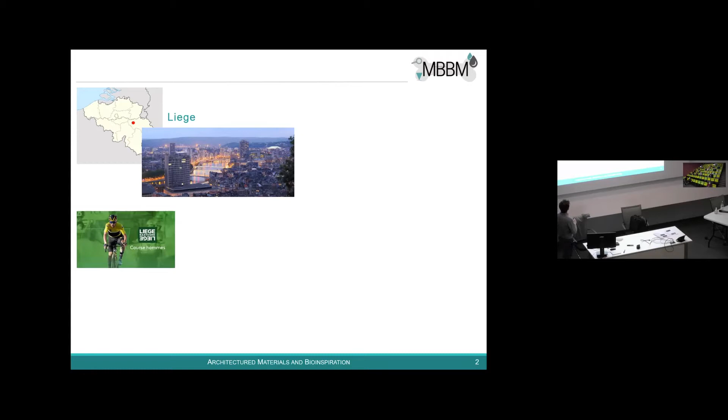Just a couple of pictures to show you where I come from, or where I'm working. I'm Italian, as Antonio, but I work in Liège, which is a city located pretty much in the middle of Belgium, in the French part of Belgium. Before moving to Liège, the only thing I knew about Liège is this famous bike race, Liège-Bastogne-Liège. But then I discovered there are other nice things in Liège: very nice, tasty beers, a bit strong, but very tasty, as chocolate also. And then there is also the university, which gives me work.

The nice thing about the University of Liège is that it's the only university in the French-speaking community of Belgium which has a university hospital. And especially if you are in my field, biomechanics, biological materials, there is a strong connection with medical doctors, so we have a strong collaboration with the doctors there.

And last but not least, in Liège there is also my group, a group of very motivated PhD students. The research that I present is mainly done by Laura Zorzetto, who is now working at the Max Planck Institute in Potsdam, where both Antonio and I did the PhD.

As Antonio said, I have two research lines, somehow complementary. I'm interested in biological materials, and especially in the interfaces between different types of biological materials. The main focus is on materials of the musculoskeletal system, and those interfaces which connect different materials of the musculoskeletal system are very interesting because they have to solve a very challenging task: connecting two tissues, like tendon and bone, which have very dissimilar mechanical behavior.

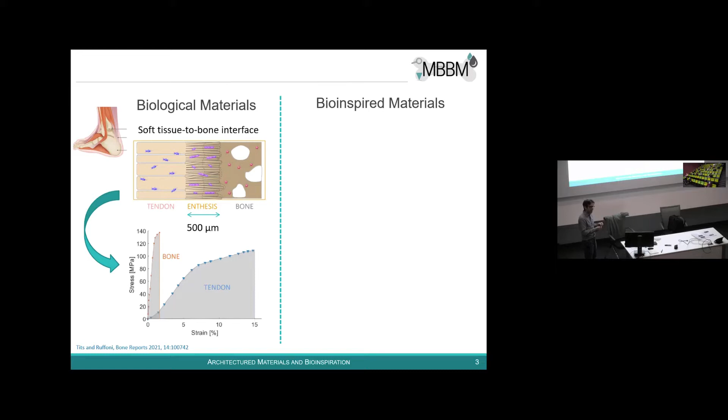So we are trying to learn what is happening here and how to translate this into synthetic materials, to facilitate the attachment of very dissimilar man-made materials.

In parallel, what we are looking at is bioinspired materials. What I mean is that we investigate biological materials, and we focus on selected construction principles at different length scales, and then we try to reproduce these and translate them into synthetic materials. This will be the main topic of my presentation today, which I will now enter into in more detail.

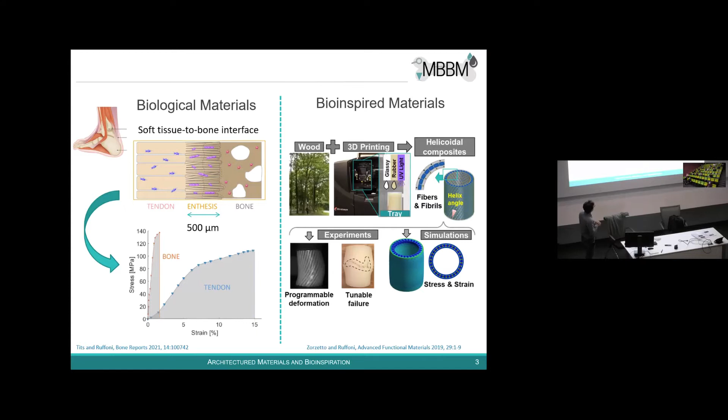Why do we plot these two properties together? Because normally they are in contrast. A material which is very stiff is normally very brittle, and a material which is very tough is normally more compliant.

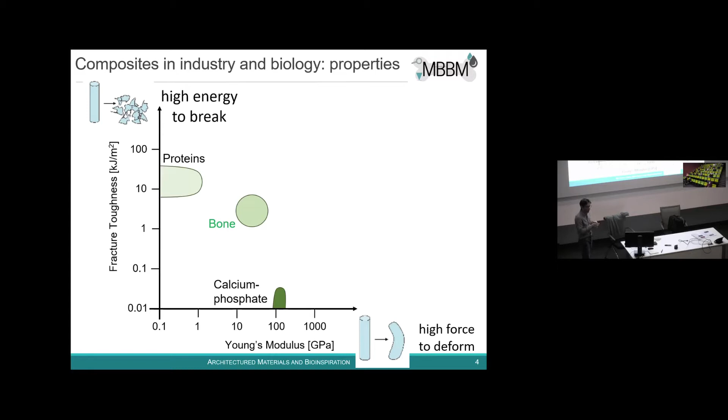In nature, if we take the example of bone, bone is composed of a mineral, calcium phosphate, which is a ceramic-like material. It's very stiff, but also very brittle. It's also composed of proteins, collagen, which are polymeric materials, biopolymers, which are soft but also very tough.

Bone has the ability to combine these two and make the best of the two properties. So when we combine the two, we have a tissue, a biological material, which is both stiff and tough. In classical engineering materials, although they have higher properties than biological materials, the relative combination of those properties is not as efficient as what nature is doing. When we combine those properties, we always have a compromise which is not there in biological material.

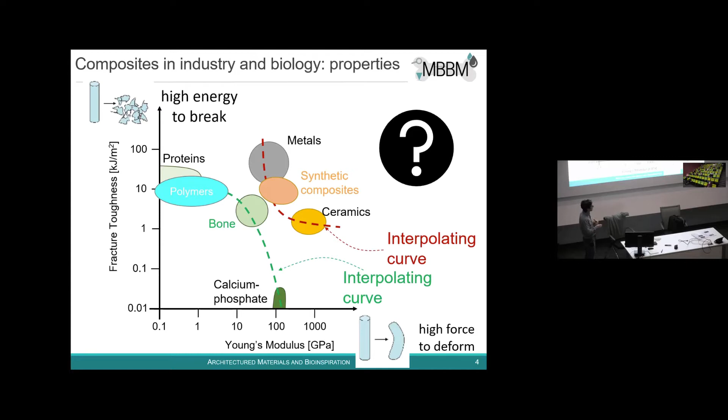This is a little bit why we consider this a nice source of inspiration, and we try to replicate those features in engineering materials by trying to see which tricks nature is using in those biological materials, such that they can combine these conflicting properties.

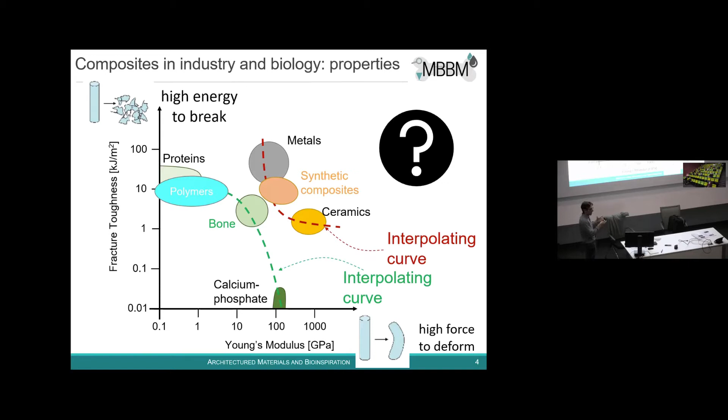By architectured materials, we mean those materials where we can define well-defined structural arrangements or structural motifs which are intermediate between the elementary building blocks, typically at the nanoscale, and the component size at the centimeter or meter level.

So we are interested in developing bioinspired materials where we can control architecture at multiple length scales between our elementary building blocks, which I will show you in case of our bioinspired materials, and the overall object size. One advantage of introducing architecture inside the material, with respect to a monolithic homogeneous material, is once again represented here in terms of mechanical properties.

I will focus mainly on mechanical properties, but there are other aspects which are also interesting in architectured materials, for example the ability to introduce multifunctionalities. But in this talk, I will consider mechanical properties.

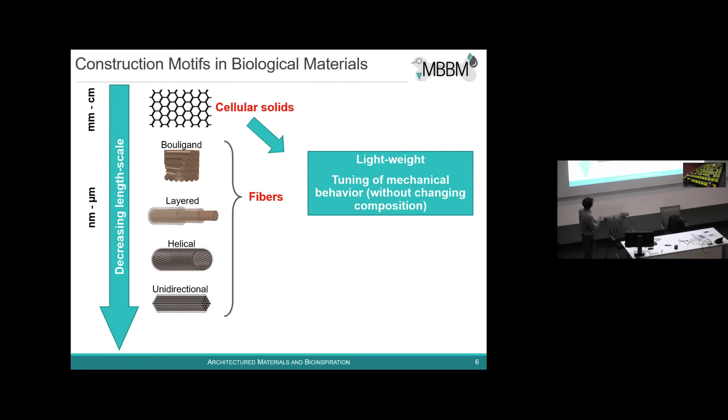Another construction principle that we see very often in biological material is that they are composed of fibers over many length scales. I'll come back to this in a second. Fibers are typically biopolymers, which are reinforced by different strategies with mineral crystals, for example, or with covalent crosslinks.

Fibers in biological materials show a very rich book of different structural motifs, ranging from unidirectional fibers, helical fibers, combination of multi-layers with fibers oriented in different directions, or also the so-called Bouligand architecture, where planes of fibers are stacked on top of each other with different angles, providing extremely high fracture resistance properties. These construction principles are very often seen in biological materials.

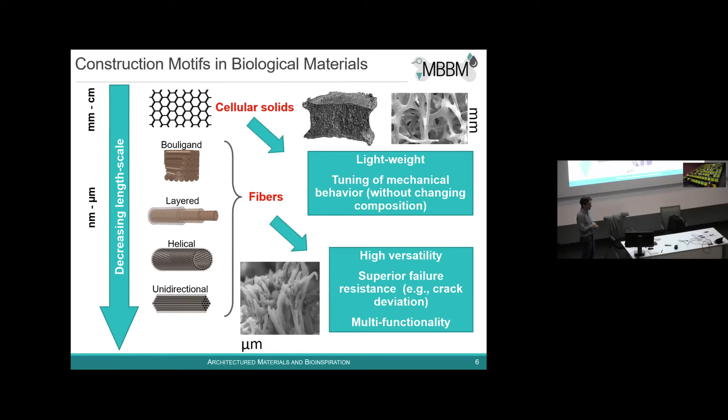These are now the construction principles that we try to replicate a little in synthetic materials using 3D printing. The aim of the research I'm presenting is really to prototype architectured materials inspired by biological composites, using three-dimensional multimaterial printing.

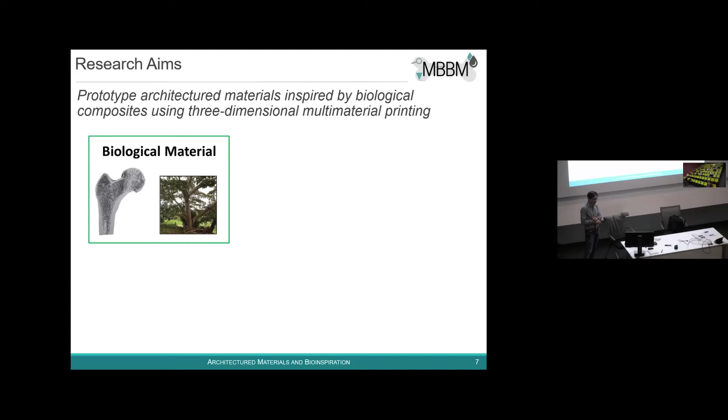The idea is that we start from an observation of a construction principle of a biological material. We focused a lot on bone and on wood. Then we isolate the construction principle, which is typically at a small length scale, intermediate between nanometer and millimeters.

Then we scale this up, simplify it, and decide which features we want to replicate. We use three-dimensional printing, and at the end we use experiments and computer simulation to understand if these construction principles also work in artificial materials, and to see the constraints and advantages that this brings to the bioinspired structure. So that's a little bit the research strategy that we are following.

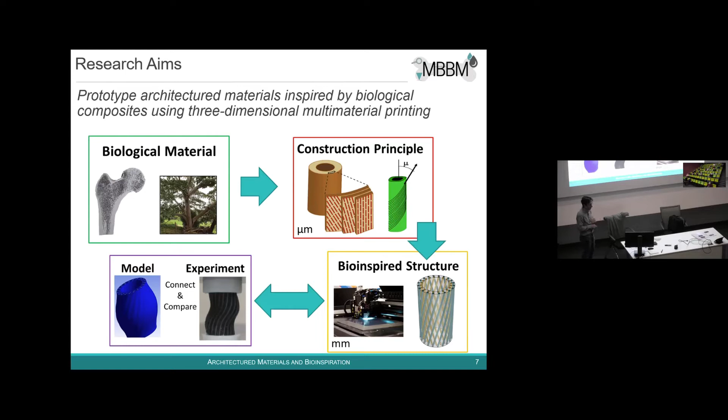What I will present today is a very short introduction to this type of multimaterial printing that we're using. Then I focus a little on the interfaces between the different materials. Since this is a multimaterial approach, one issue is that there are interfaces between the different materials, which have not been much investigated. Then I'll show you one example of a bioinspired helicoidal composite material, and then of a cellular solid material that we have been developing.

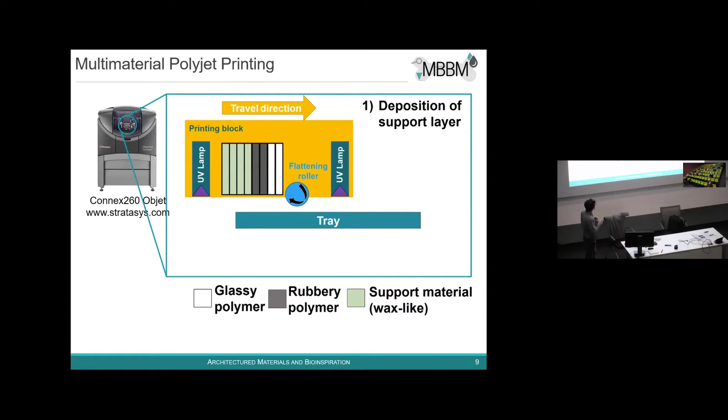The first thing I want to speak about is this three-dimensional printing. We are using a commercial printer, and I will tell you a little later why we chose to go in this direction. The printer is a polymer printer, based on the deposition of monomers, liquid monomers, droplets of liquid monomers, which are then flattened by a roller and cured by UV light.

There's even a small animation. The printer head is moving from left to right, depositing different droplets of different polymers. They are deposited on the build tray, flattened down by a roller, and then cured by UV light. Typical droplet dimensions are about 20 micrometers, and layer thickness, since this is a layer-by-layer technique, is about 20 micrometers as well. That's the resolution, the theoretical resolution of the printer.

What's nice is that with this printer you can combine different basic polymers, liquid inks, which in this animation are only 2, but now the new printers are able to work with up to 5 different inks. Different inks then result in cured polymers with very different mechanical properties. This technology is called polyjet printing, based on photocurable monomers.

Since it's commercially a commercial printer, it's stable, it's reliable, but of course it's a proprietary technology, so there is no possibility yet to customize the inks, for example inserting nanoparticles and so on. This is something which is not really easy to do.

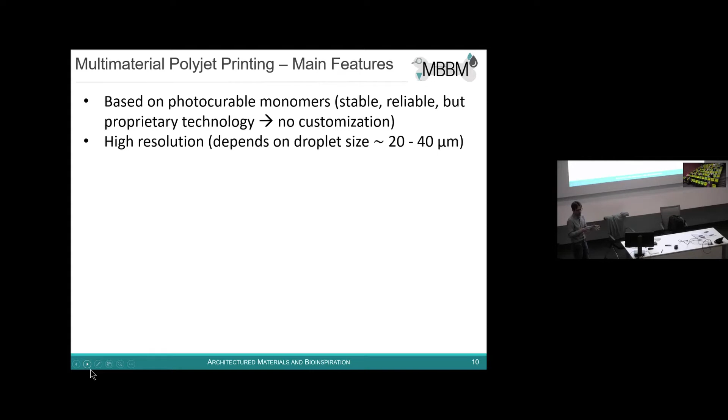That's probably the multimaterial technique commercially available which has the highest resolution, because we have droplets of about 20 to 40 micrometers in diameter, depending on the layer. And this allows them to build objects which are about 25 centimeters in size. So we have this control over multiple length scales.

And then, as I said, it's multimaterial. The two basic materials, the two most extreme materials that we can use, are the stiffest material, which has a Young's modulus of about 2.5 gigapascals, so it's a hard plastic with an elongation at break of 15%. And the softest material has a Young's modulus of about 1 megapascal with an elongation at break of 220%, so it's an elastomer. So we have 3 orders of magnitude variation in mechanical behavior that we can combine.

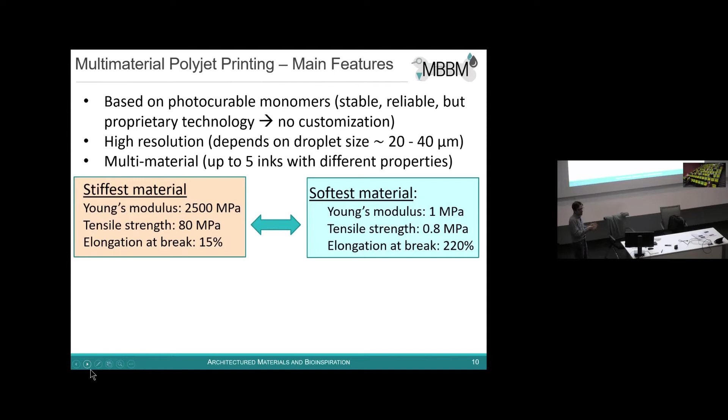So in that sense, it's multi-material, although it's still based on polymers, but we can cover a spectrum of 3 orders of magnitude. And what I find very interesting is that we can fabricate so-called voxelated soft-hard matter. So, repeating myself a bit, we can build centimeter-sized objects which have a programmable composition and structure at the micrometer level. There's a nice Nature paper from the group of Jennifer Lewis at this institute describing the new avenues which are opening up for this type of voxelated materials.

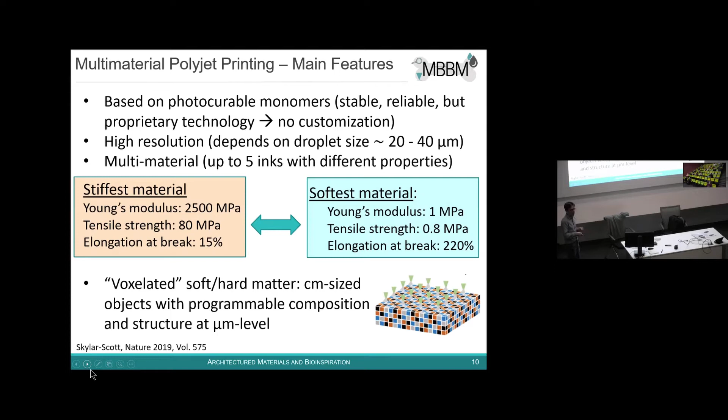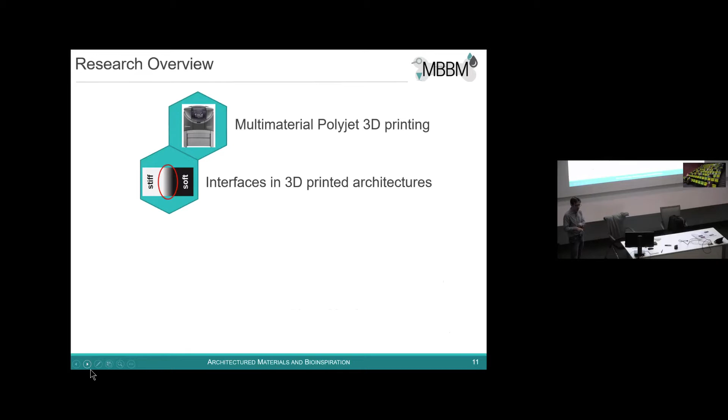Now, okay, this was the short introduction. Now I'll focus a little bit on the interfaces between different voxels and different materials in this technique. So, yes, let me just repeat what I just said: we can tune with this approach local microstructure, chemical composition, and mechanical properties.

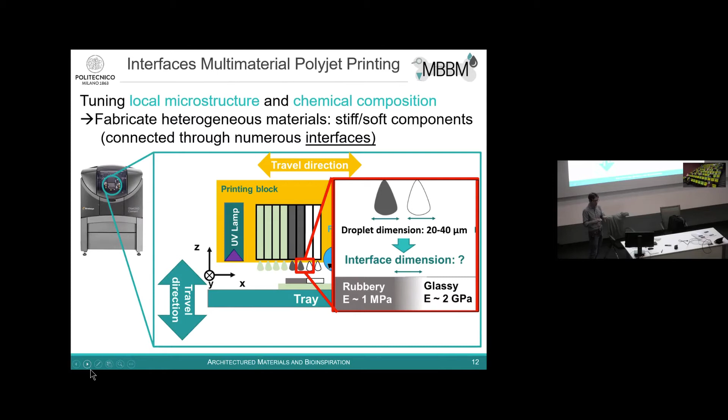We have 2 different droplets which are deposited and which are then cured on this layer. And the question is, what is happening at the interface between these 2 different droplets, or these 2 different polymers, depending a little bit on the printing modality.

And if you enter into the details of the printing process, there are 2 different ways that 2 polymers can get in contact. You can have a simultaneous deposition of the two polymers, which are represented here with the 2 colors, so they are deposited simultaneously and get in contact on the build tray before being cured by UV light. Or they can be deposited consecutively, so you first deposit one polymer and then cure it.

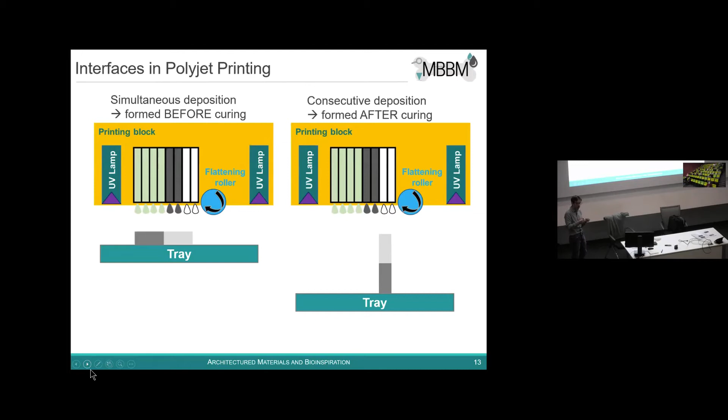And then on top of an almost fully cured polymer, you deposit the second droplet, and then you cure this. So this is what we call the interface formed after curing, versus here the interface is formed before curing of the 2 polymers. And we are asking, what are the properties of the interfaces in these 2 different scenarios?

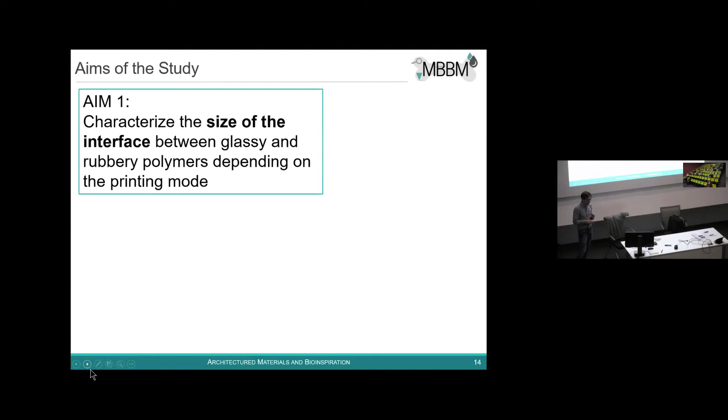So, yes, the two aims of this research are to characterize the size of the interface between these glassy and rubbery polymers. For that, since we have micrometer length scale droplets, we have to use a technique which allows this resolution.

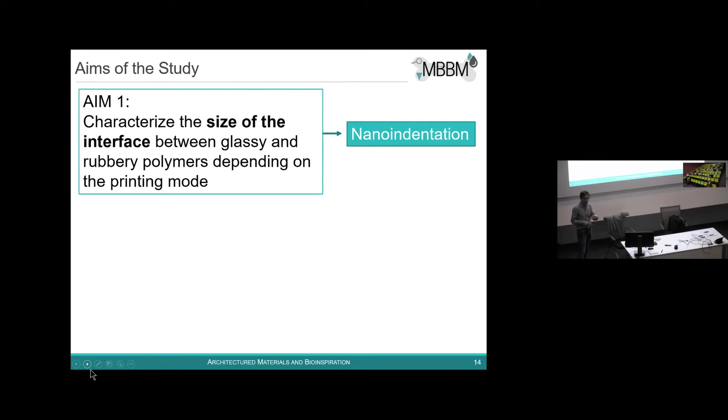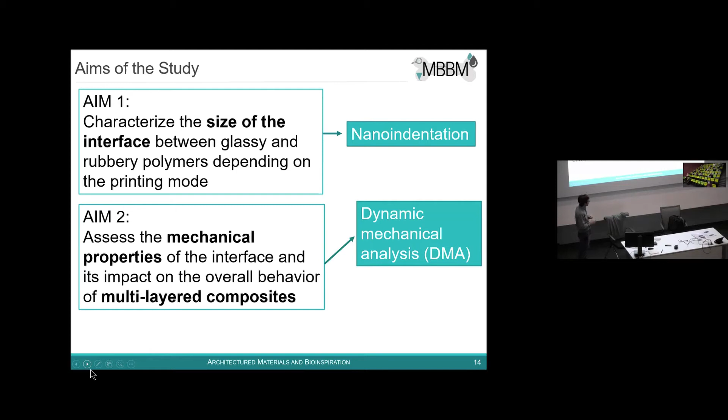And so we chose to use nano-indentation. And then we want to assess the mechanical behavior of the interface and the impact of having an interface which is not ideal, so it's not a zero-thickness interface — the impact of this interface on the behavior of multi-layer composites, simple multi-layer composites. For that, we use dynamic mechanical analysis and some numerical modeling.

Yes, so I think here I can go a little bit quicker. We prepare the samples first for nano-indentation. We printed small samples where the interface was formed before UV curing. And by changing the orientation of the samples, we obtain samples with the interface formed after UV curing.

And then the problem with nano-indentation is that we need a very smooth surface, which is also a bit tricky when you have polymers with such big differences in mechanical behavior, because you cannot do standard polishing like in metallurgy. So what we did here was cryomicrotome cutting, and so we had a very smooth surface, nanometer-scale roughness, and then we could nano-indent.

So we pressed a diamond tip on the samples and measured the force and displacement of this tip. Then we used models, based on the force-displacement curve, to get the local Young's modulus. This is also a bit tricky, not straightforward, because we have to indent stiff polymers and soft polymers, and in soft polymers you have adhesion effects, which is something you have to take into account when you indent.

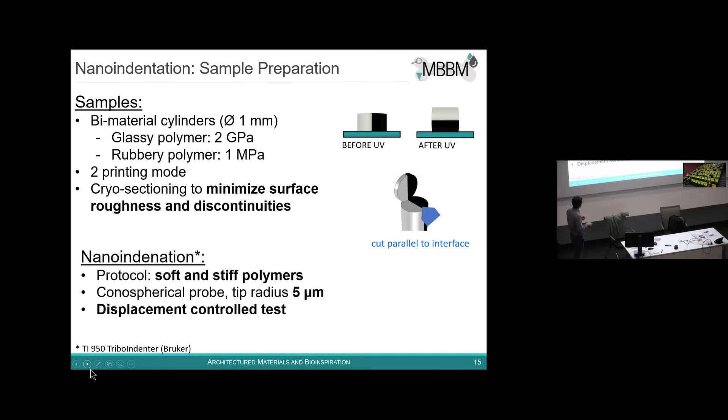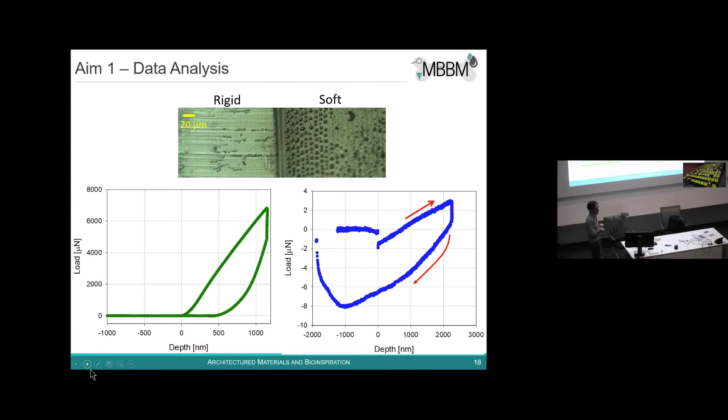So yes, we needed to develop the indentation approach a little bit. Fortunately, there is already quite some literature on indentation of very soft materials, so we could exploit this, and basically from our measurement we could estimate the contact radius between the probe and the sample and use this to derive the so-called reduced modulus of the indentation.

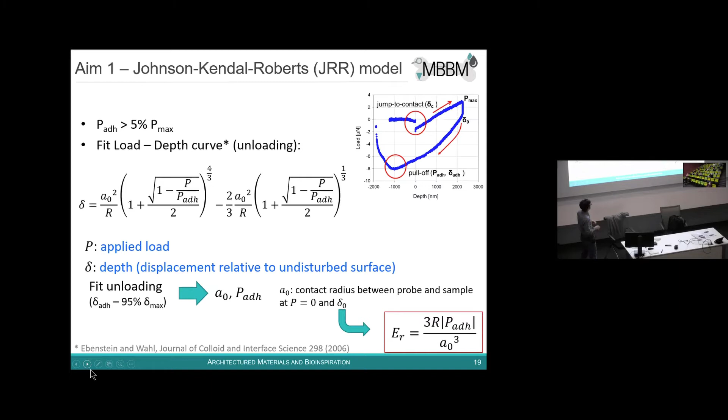Now I jump to the result. These are the properties of the interface formed after UV curing, where one polymer is deposited on top of an already partially cured polymer. Going from the stiff to the soft polymer, plotting relative position in spatial coordinates, you see a very sharp transition of about less than 20 micrometers, a transition between 2 gigapascal and less than 1 megapascal in properties.

Here we don't see those regular blisters anymore. This time we indented between stiff, soft, stiff, to acquire more points and see the trend of the interface. You see that the interface is much broader, and we measure an interface thickness of about 150 micrometers, which is several times the dimension of the droplets being deposited.

So there is some diffusion, and also some mechanical diffusion if you want, because of the roller which levels the layers, plus some probably chemical diffusion, mechanical and chemical diffusion. In any case, there is some chemical diffusion where the droplets, the monomers, the oligomers, interdiffuse and broaden the interface.

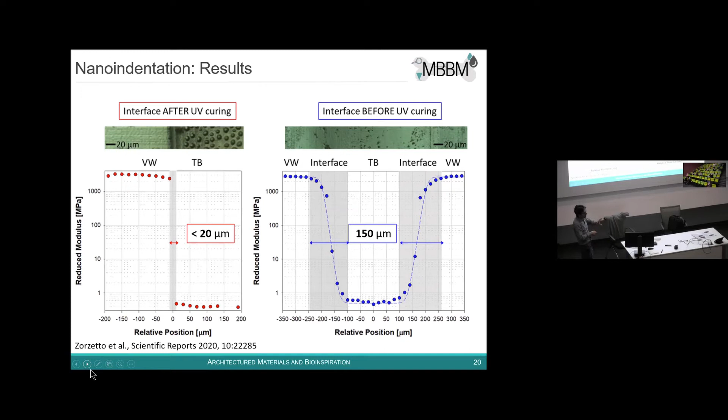These are first results showing how critically the thickness of the interface depends on the printing modality. We then wanted to assess the impact of the interface on the behavior of very simple multi-layer composite materials, so we printed composite materials at the millimeter length scale with alternating layers of soft and hard polymers, printed such that the interface between layers was either sharp or very broad.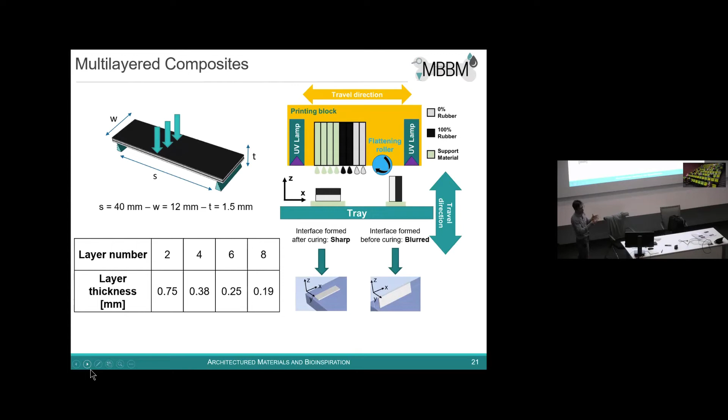We printed these and then performed dynamic mechanical analysis to measure the dynamic properties, using a 3-point bending configuration, scanning the behavior across different temperature ranges to see what happens across the phase transitions. The main outputs we consider are the so-called storage modulus and the tangent delta, typical parameters describing the dynamic behavior of these polymeric systems.

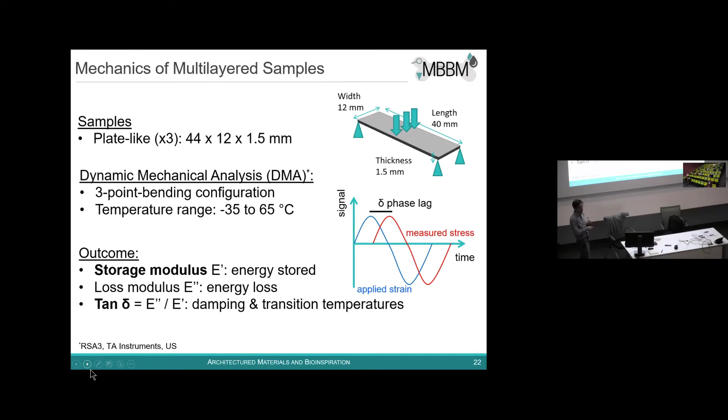Now I will just show you this, a plot of the storage modulus.

Let's concentrate on this region around room temperature, a little away from glass transitions, and look at what happens when we increase the number of layers. This is a system with only 2 layers, stiff and soft; this has 4, 6, and 8 layers. The volume fraction of stiff and soft phase is always the same—we're simply redistributing it across the cross section, which changes the area moment and the bending behavior.

With a blurred interface, about 150 micrometers, when we increase the layers from 2 to 8, the storage modulus increases. This isn't surprising—it's in agreement with composite beam theory. By redistributing the stiff material across the interface, you get more rigid behavior. This is predictable, understandable, and we were happy.

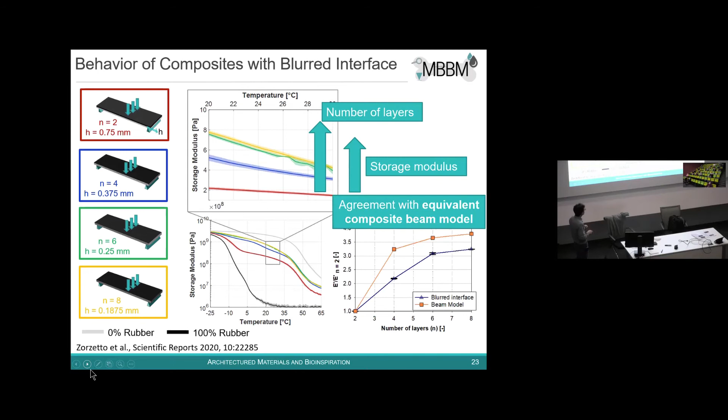The problem is if you do this with a sharp interface instead, with exactly the same configuration—layers from 2 to 4 to 6 to 8—but now the interface is very sharp, less than 20 micrometers compared to at least 150 before, we see no changes in mechanical properties as we increase the number of layers. Everything stays flat from 2 to 8.

We see this also in the full storage modulus versus temperature curves. In gray is the storage modulus of the stiff phase, in black of the soft phase, and these are the storage moduli of the different layers. Here I zoom into a temperature range a little away from the transitions.

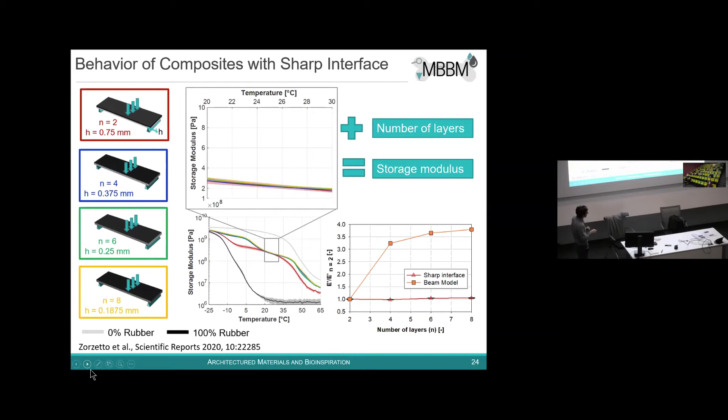This is something we didn't understand at first, and it's also in contrast with the beam model. A simple beam model would predict an increase in bending rigidity because we're redistributing the material, but what we see is that bending rigidity does not depend on the number of layers. So we asked, what is going on?

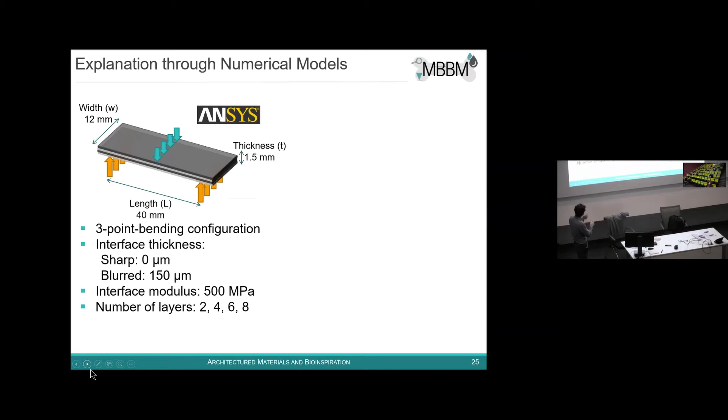To understand this, we did finite element simulations, translating our system into a virtual material, replicating the experimental conditions, considering both sharp and blurred interfaces. In the sharp interface case, our simulations also show no increase in bending rigidity with more layers. The blurred interface simulations were qualitatively similar to experiments, as were the sharp interface simulations.

What's happening in the simulations is that we accounted for shear behavior. With a very sharp interface, there's transmission of stresses that induce a lot of shear in the soft layer. The stiff layers deform with a lot of shear deformation between them induced by the soft layer, which is not present with a blurred interface. This is a didactic example showing the impact of such interfaces, even in a simple geometrical arrangement like this multi-layer composite.

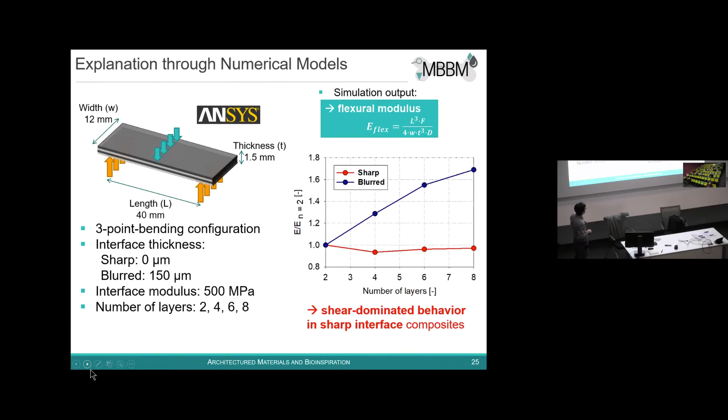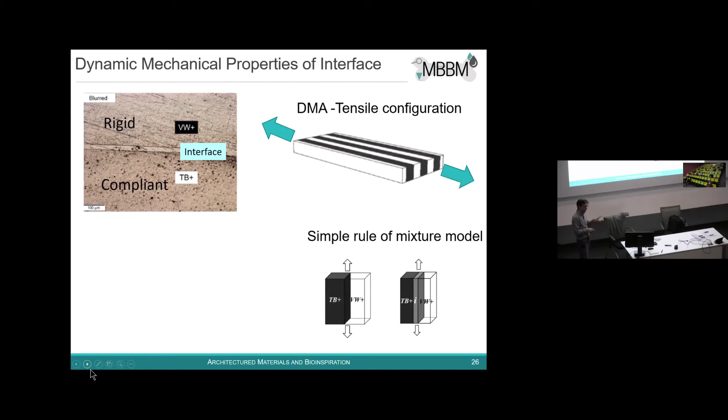We then went further and designed other samples. This is an optical picture of the interface between the rigid and compliant polymers. We tested these samples in tension rather than 3-point bending, still using dynamic mechanical analysis but in a tensile configuration, because that let us use a simple rule of mixture model to extract the dynamic properties of the interface itself—something not possible in 3-point bending since it gets too complicated, especially for the loss properties. So we used a simple rule of mixture to build a model predicting the storage modulus, loss modulus, and tan delta.

We then compared what happens in these plate-like multi-layer samples with different amounts of interface due to different numbers of layers. To cut the story short, what we see is that the interfaces, although mixing equal amounts of soft and hard polymer, are strongly dominated by the rigid component.

So the interface has properties which are strongly dominated by the rigid polymers, and also in the interface itself, the viscoelastic dissipation typical of the soft polymer is totally suppressed. So that was a little bit surprising.

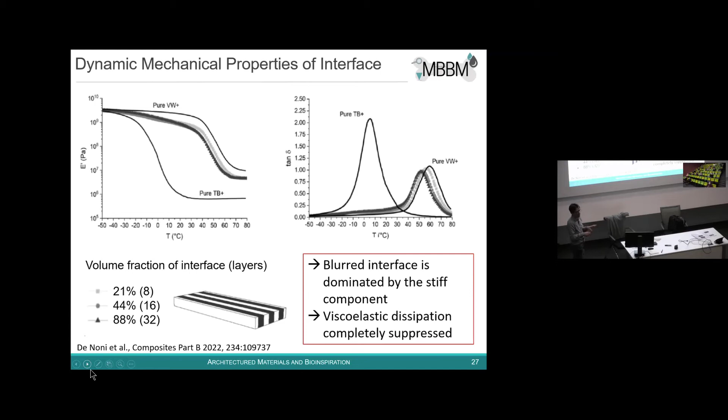So in conclusion, here we have proof that there is formation of an interface in this 3D printing multimaterial approach, which can be several times bigger than droplet size. This blurred interface is actually an interface, a third material which has properties more similar to the glassy polymer, both in storage properties and dissipation properties.

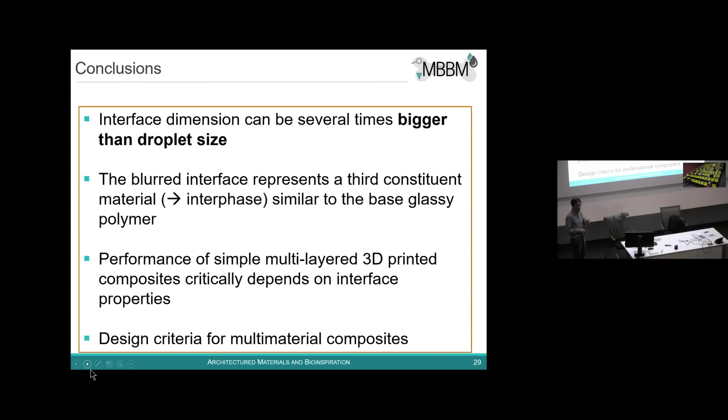We have shown that the performance of these simple multi-layer 3D printed composites is critically dependent on the interface. This can provide new design criteria for multi-layer materials where we have to account for the presence of the interface. So I'll go maybe to the second study, and then take questions at the end, if it's okay.

Now I'll show you a study we did on helicoidal composites, now that we know a little bit what is happening with the interface and what dimension we expect for it. I want to show a different study where we introduce fibers. The motivation is that many biological materials, as I said, are constructed with fibers, and fibers also have some typical helicoidal arrangement.

Two examples are bone and wood. Bone is composed of two types: cortical bone, which is very compact, and trabecular bone, which I quickly presented before as the highly porous type found in the vertebral body. Cortical bone has very small porosity, but there is some porosity because of blood vessels, which bring nutrients to cells, protected by features called osteons.

Osteons are cylindrical features where fibers of collagen are arranged in a helicoidal fashion. This is something at the micrometer length scale that we see in bone. And in wood, similarly, we also have helicoidal arrangement.

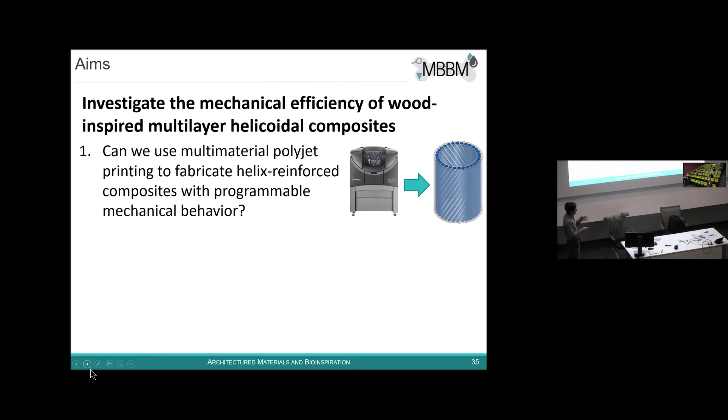Our idea is somehow to translate this, which is quite straightforward, into artificial materials with 3D printing. And then we want to exploit it further, which is a little bit less straightforward.

We want to understand the interplay between a central layer with thick fiber and inner and outer reinforcing layers with much smaller fibrils, and to see the mechanical interplay when I try to reinforce a central layer where fibers have some angle, with smaller fibers arranged either internally or externally.

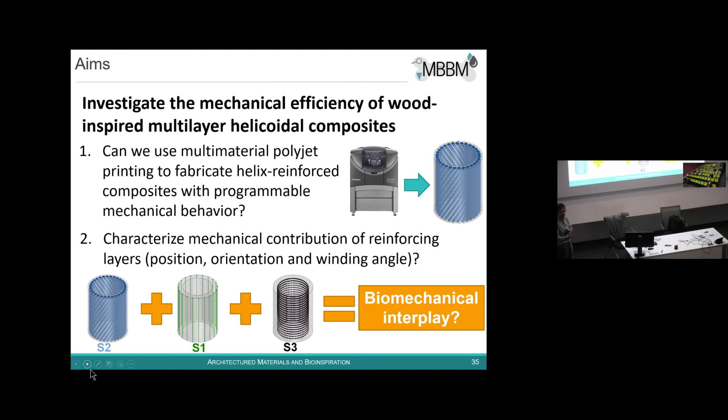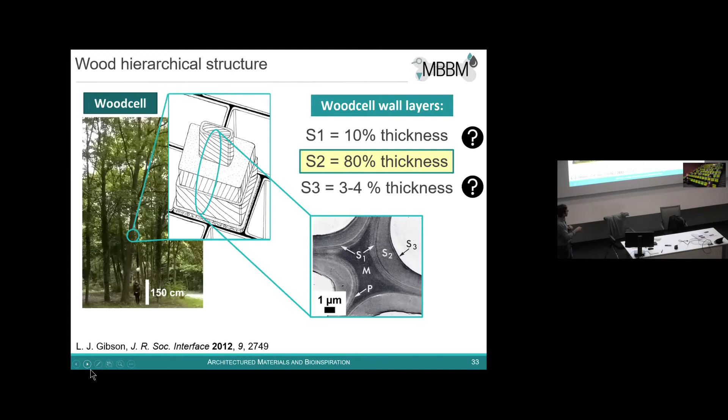This is something that is not so clear, and also in wood it's not so clear what the role of the S1 and S3 layers is. That's why we thought if we do this, we could maybe learn a little bit why in wood we have these much thinner layers where fibers have typically horizontal orientation, rather than a well-defined orientation as in the central layer.

So we designed and had to scale this up because of printer resolution, since we cannot print at the nanometer length scale of cellulose. We scaled up to the millimeter length scale and printed a system with a central layer representing 60% of the thickness of these cylinders, reinforced by smaller S1 and S3 layers making up about 20% of the total thickness. In terms of fiber volume fraction, the central layer has 30% fibers with the rest a soft matrix, and we have 3 to 6% volume fraction of reinforcing fibers in the inner and outer layers. We combined different configurations.

We had the main layer with fibers from 0 degrees vertical up to 45 degrees, and as reinforcing layer we considered both only horizontal and only vertical fibers, to reduce the parameter space and see the interplay in terms of mechanical properties when we vary these structures.

How much time do I have? Still 5 minutes approximately, right? 15 in total? Okay, thanks.

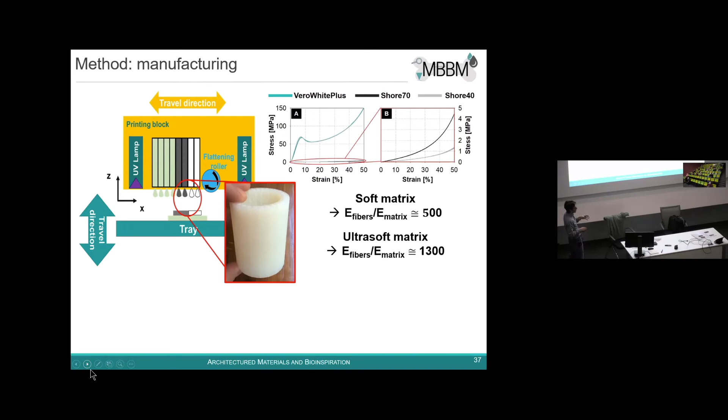We 3D printed this using stiff fibers, about 2.5 gigapascals, and considered two types of matrix such that the elastic contrast between fibers and matrix is a factor of 500 or more than a factor of 1000, what we call soft matrix or ultra-soft matrix. The matrix is an elastomeric material, and the fibers are glassy rigid polymers.

We then performed mechanical tests to failure and explored the behavior of the system.

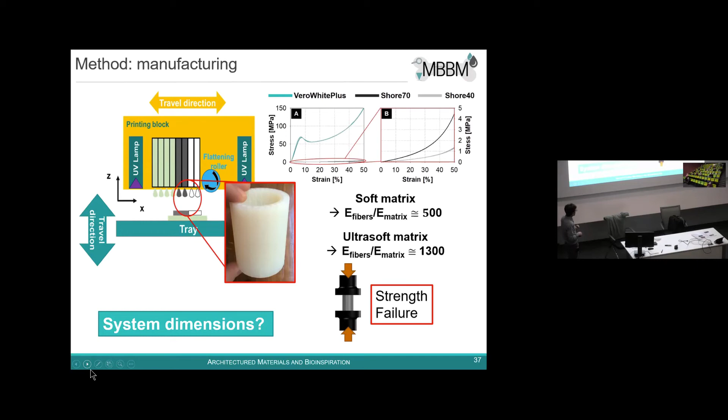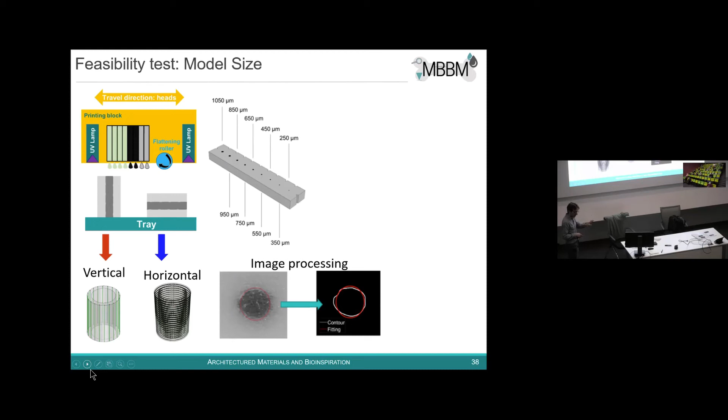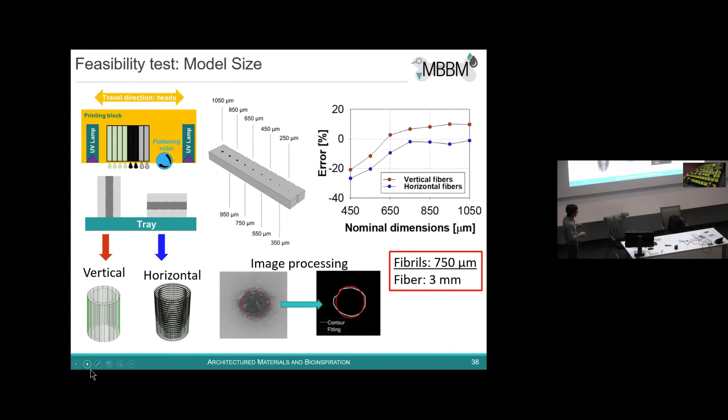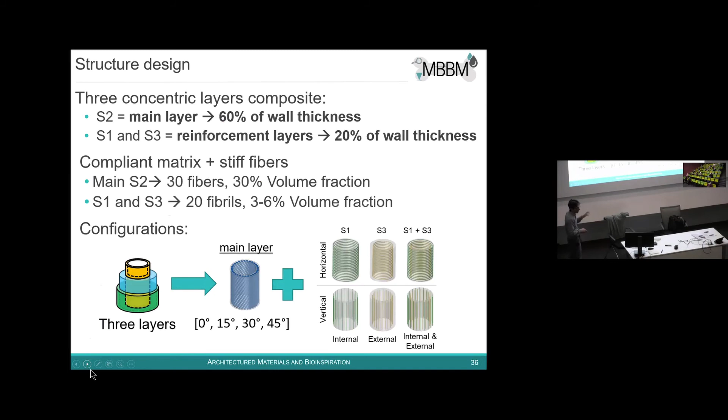One first question was: what is the minimal dimension of the fibers we can print? We did a preliminary study based on printer resolution and interface dimension, and found the minimal diameter for fibrils that are still representative in terms of mechanical behavior is about 750 micrometers. We scaled fibers up to 3 millimeters in diameter, reinforced with smaller fibrils of 750 micrometers diameter, so a factor of up to 4 less.

We first did an analysis of the apparent stiffness of the system by changing the fiber winding angle, and also the maximum compressive strength. We see that this technique allows us to tune or program the stiffness of the system, with similar qualitative trends for both soft and ultra-soft matrix.

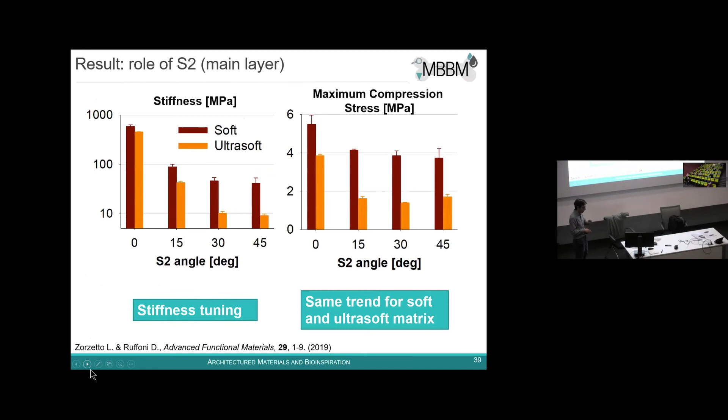I'll quickly skip this because I want to show you something more interesting, then come back to it. We performed experimental tests to failure, and here is what we see.

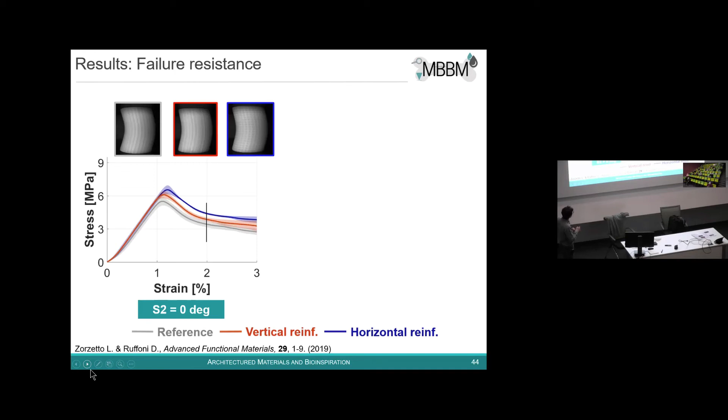This is the behavior for straight fibers: a cylinder with straight vertical fibers. Not a big surprise—when we compress this system it buckles, going into buckling failure. If we add either vertical or horizontal reinforcement, we don't change the behavior much. There's a small increase in buckling strength, but the behavior is substantially the same. We're not tuning or influencing the structure much this way.

What's interesting is what happens when we do the same exercise but the main fibers have some angle. Here I present results at 15 degrees, for example. At this angle, the system does not show the big, catastrophic failure seen with straight fibers.

What is interesting is what happens when we add vertical reinforcement, reinforcing the tilted fibers with vertical fibrils. They provide a slight increase in stiffness, but essentially the behavior does not change a lot. You see this collective buckling or kinking of these vertical fibers, a collective buckling because they somehow feel each other through the matrix. So as soon as one fiber buckles, the whole structure buckles.

But what is interesting is when we introduce the horizontal reinforcement. This reinforcement is able to delay the failure and dramatically increase the strength of the system.

We also see this if we examine the post-failure structures. In the case of vertical reinforcement, we see a long crack running through the system. In the case of horizontal reinforcement, the crack at some point also runs horizontally. So we are also tuning the way it breaks.

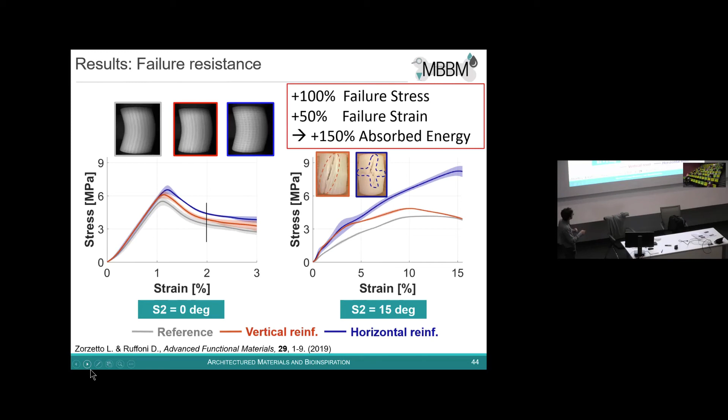Because of this, we have a 100% increase in failure stress, a 50% increase in failure strain, and a structure which absorbs 150% more energy.

I also want to show this plot. We ran finite element simulations of the same structure to understand how it deforms, and we saw that introducing horizontal fibers blocks the expansion of those cylinders.

When we compress and measure the Poisson ratio, the expansion perpendicular to the direction of compression, we saw that with vertical fibers the behavior is pretty similar to having no fibers, while with horizontal fibers we block the expansion, giving a much smaller Poisson ratio.

On the other side, what increases is the rotation of the cylinder. The rotation along the vertical axis increases where we add horizontal reinforcement. So the horizontal reinforcement triggers more rotation of the system, and this delays the failure and also deviates the crack from vertical to horizontal direction.

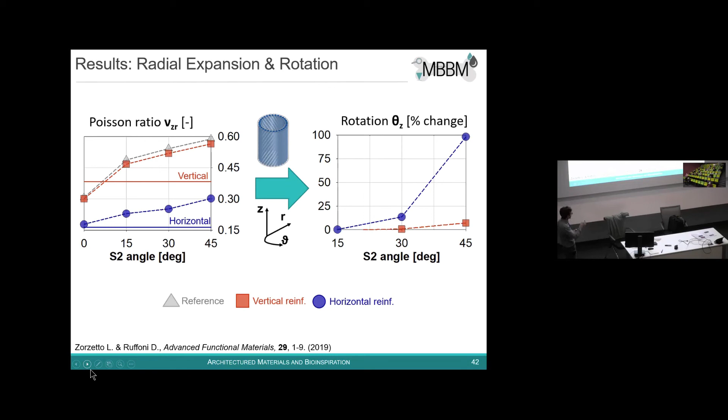So I think this is something we've shown. To conclude this part, we performed this study to assess the role of these reinforcements, inspired by the structure of a wood cell wall.

We developed samples which show a similar trend to our simulations. We prove how the reinforcements avoid catastrophic failure, and with just a minimal increase in volume fraction, if we place the fibrils in a smart way, we can delay failure and obtain a degree of programmable mechanical behavior.

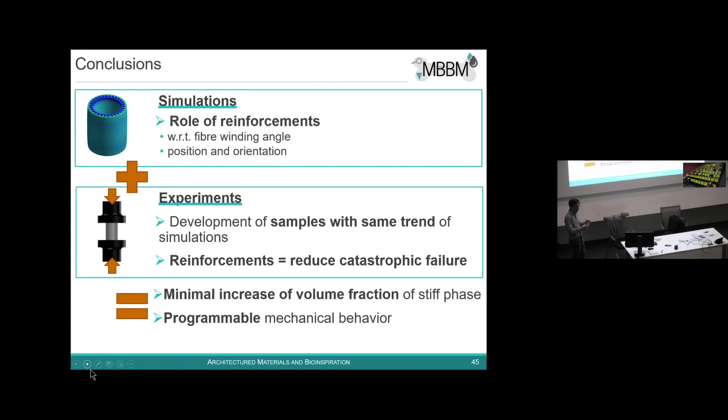Now I'll show you the last study, which is more about cellular solids construction principles. We're interested here in something not too bioinspired, since it's not commonly seen in nature, but an interesting type of structure that got our attention: so-called auxetic structures.

Auxetic structures are structures that show a negative Poisson ratio. A negative Poisson ratio means that if I have a non-auxetic material and apply a tensile force, the material shrinks in the direction perpendicular to the tensile force, while an auxetic material expands in the direction perpendicular to the tensile force.

This shows auxetic behavior, and the same is true for compression. A non-auxetic material expands in the direction perpendicular to compression, while an auxetic material shrinks in this direction.

Why are these materials interesting? There are several applications one could think of. One is that they show enhanced impact resistance, because in a non-auxetic material, with a local indentation, the material tends to flow away from the indentation point. In an auxetic material, the material tends to concentrate at the indentation point, reinforcing or sustaining the impact.

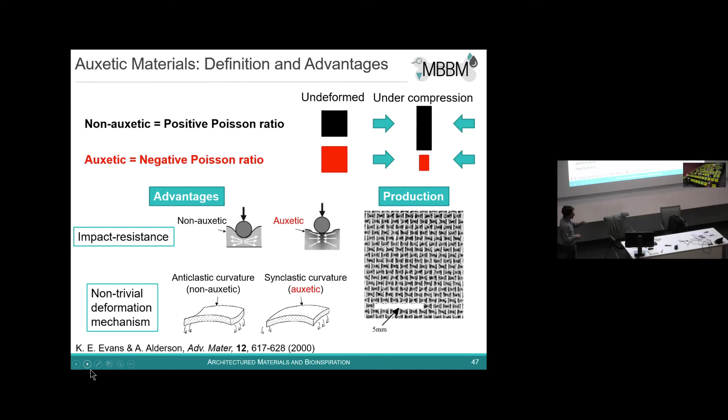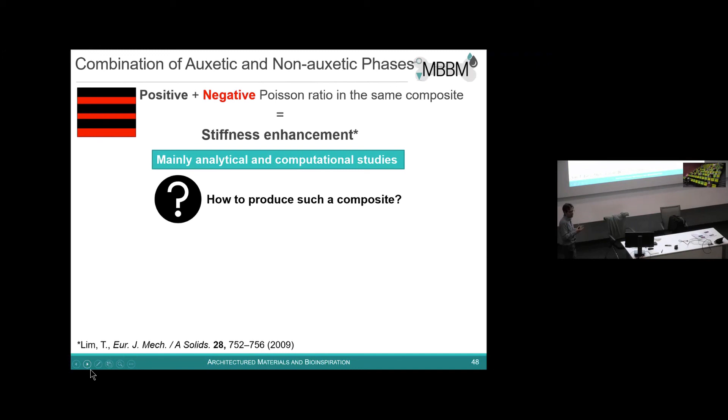So you can tune the microarchitecture of the material such that your structure shows auxetic behavior. Why are we interested in these materials? Because there were theoretical predictions that if you combine materials showing positive and negative Poisson ratio in a composite, you could get enhancement of mechanical properties. This was assumed theoretically but never demonstrated. So we thought maybe we could use cellular solid principles to design lattices combining reentrant auxetic inclusions with non-auxetic inclusions, and see which type of behavior we get.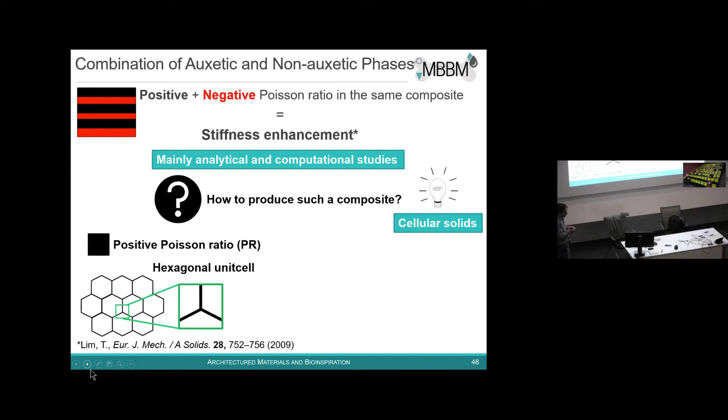So we combined so-called hexagonal lattices, which show classical positive Poisson ratio behavior, with reentrant lattices, which are quite simple lattices showing auxetic behavior. And then we asked, what happens when we combine those two?

The idea is first to study the effect of a single auxetic inclusion in an otherwise regular lattice, to see if the auxetic behavior is retained when I take this inclusion out of an auxetic lattice and place it in a regular lattice. Does it retain the auxetic behavior or not? Then, what happens if I make a pattern of inclusions, and what is the overall behavior of those structures?

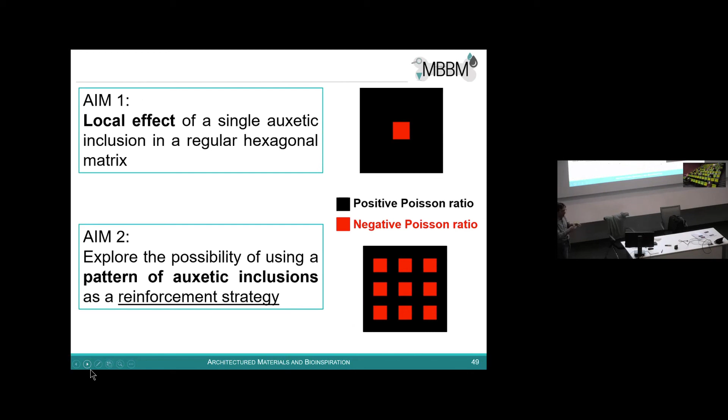So first we introduce this auxetic phase just by shifting one joint. When the connection between three beams is one joint, we shift it down, and then we have an auxetic inclusion. The lattice is otherwise regular, and we simulated what happens at the level of this inclusion when we compress it. This was the research question.

So we apply a uniform compression and compare the behavior with respect to a regular lattice. With the simulations, we could get the deformation at each point. We consider these triangular unit cells, the basic unit cell that you repeat in space to build up your hexagonal lattice.

By knowing the displacement at each of the vertices of this unit cell, we could calculate the overall strain of the unit cell when it's inside the regular lattice. If it's inside the regular lattice, the strain is everywhere the same—this is an isotropic material, an isotropic structure.

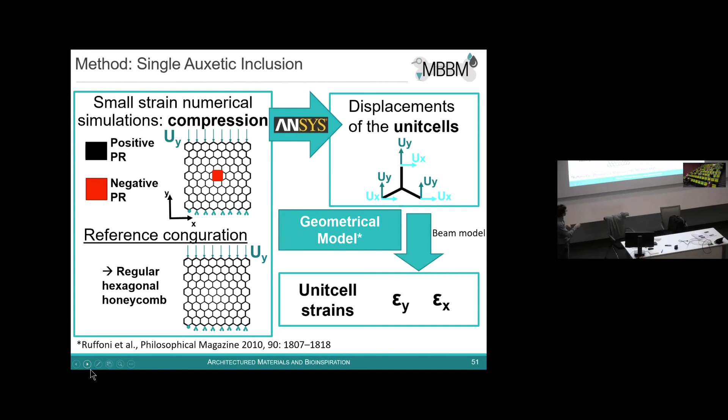The question is, what happens when we have an auxetic inclusion here? What we saw is the following: if we compress along the vertical direction, and plot the strain of the unit cell with respect to the strain of the regular lattice, in the regular lattice, when I isolate one single unit cell, its strain relative to the regular lattice is 1, because everything is the same.

But if I consider the auxetic inclusion unit cell, I see that its strain is less compared to the corresponding regular lattice locally. This means it's deforming less, so it's a bit more resistant, when I look at the vertical direction, which is the direction of compression. So the lower deformation at the reference unit cell means it's locally stiffer.

And when I look at the strain in the horizontal direction—so I compress vertically and look at the strain in the transverse direction—I see that in the regular lattice this is 1, because it's isotropic. This means the Poisson ratio is close to 1, the ratio between the two. And here I see that it's negative.

This means that this auxetic inclusion, although placed in an otherwise regular lattice, can still retain the auxetic behavior. So although the environment around this inclusion is not a completely reentrant lattice—you have to see this as a defect inside the regular lattice—it's still able to carry its own character.

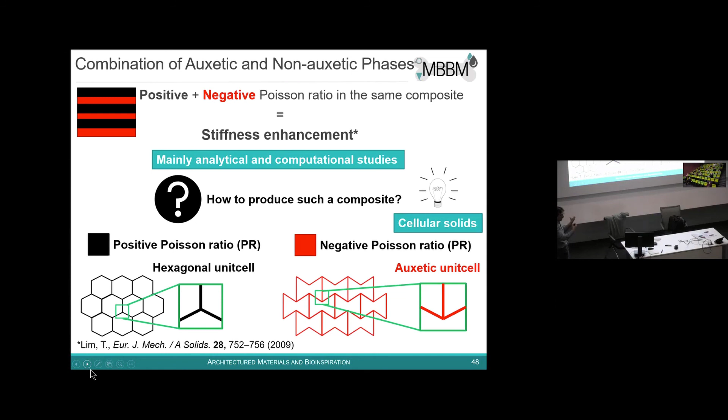So we said, okay, but since this is stiffer and has this auxetic behavior, let's try to generate a pattern of inclusions, where we introduce not just one as before but several reentrant inclusions. We could introduce up to 12.5 volume fraction of the reentrant inclusion, and see what happens in terms of apparent properties.

Our assumption is that this lattice is stiffer because the inclusions have a contrasting deformation mode. The regular unit cell wants to expand while the other wants to contract, and this creates a contrast in the deformation mode, which stiffens the lattice.

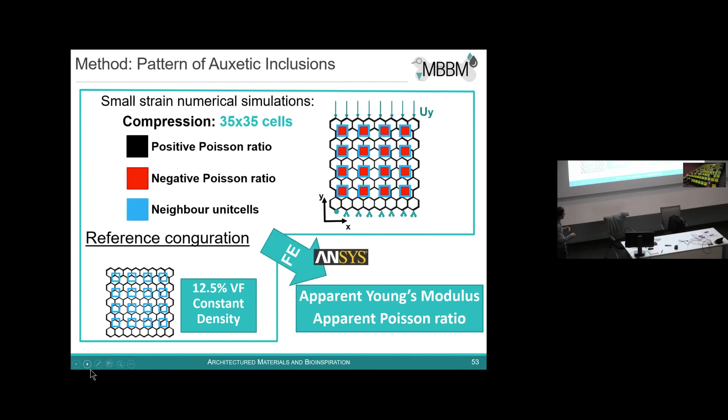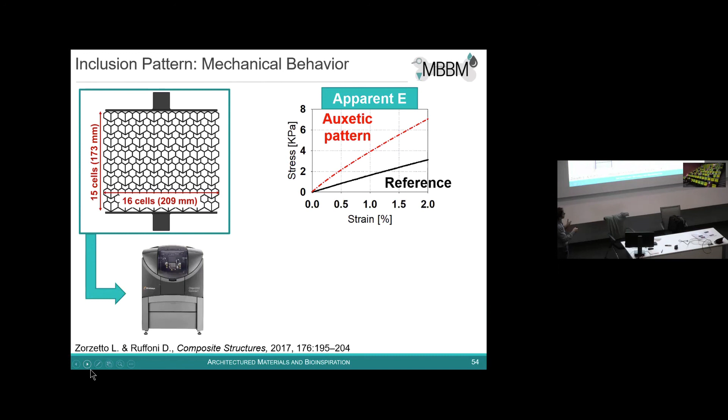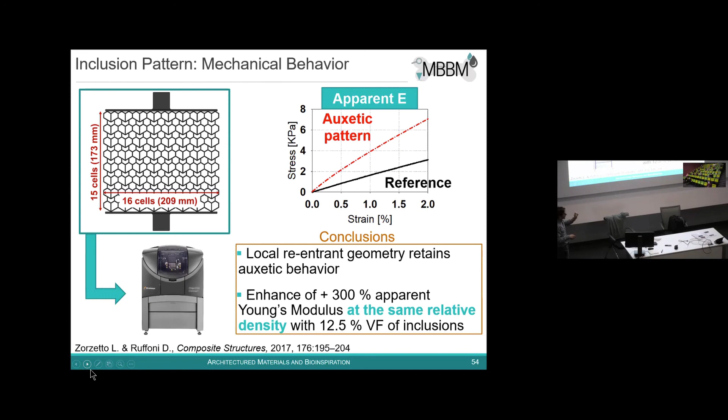So we did both simulation and experiments, and we see that the apparent stiffness—shown in the stress-strain curve and the tangent modulus, which tell us the apparent stiffness—is actually higher for the lattice with the pattern of auxetic inclusion. This is up to a 300% increase in stiffness without changing the relative density. What I find nice is that we don't add more material, we don't change the anisotropy, and we don't orient it differently. The relative density stays the same, but because of this contrast in deformation mode, we increase the stiffness up to 300%. I think this is the conclusion.

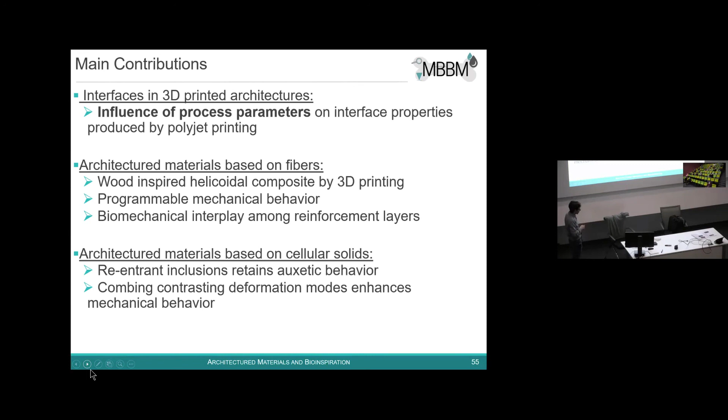I have 2 more slides—do I have time for those? To conclude, I'll show you what we are doing in our research on 3-dimensional printing: a bit about the influence of printing parameters on the interface, how we design and print helicoidal composites inspired by the structure of wood, and some cellular solid composites which exploit this reentrant auxetic/non-auxetic behavior. Then a couple of slides on outlook, what we are doing now.

We are interested again in interfaces, but now in tuning the interfaces to enhance attachment between dissimilar materials. So I come back a bit to what I said at the beginning.

In nature, we see two main strategies to attach dissimilar materials. One is seen in the mussel that has to attach to a solid rock: this attachment is through long polymeric bundles or threads, which display gradients at the level of centimeters—these filaments are graded in composition and properties over several millimeters up to centimeters. On the other side, there is the attachment of tendons to bone in the musculoskeletal system, where the gradient occurs over a much smaller length scale, only about 500 micrometers.

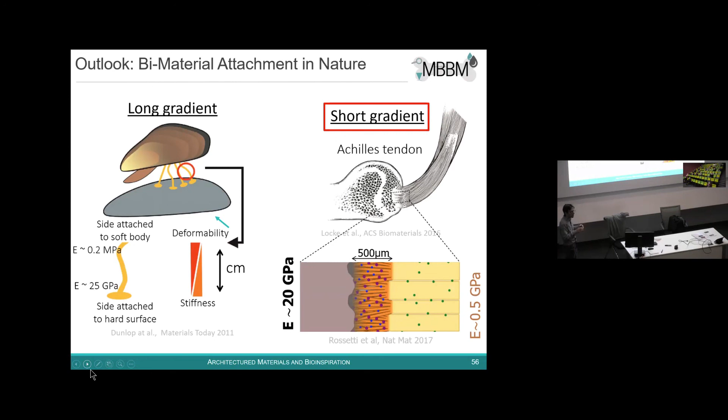These are two different strategies that we are trying to explore and replicate in the attachment of dissimilar engineering materials. In this example, we are trying to engineer the interface between a hard material and a soft material. The frame around it is just printed because we need to cut it with the cryomicrotome.

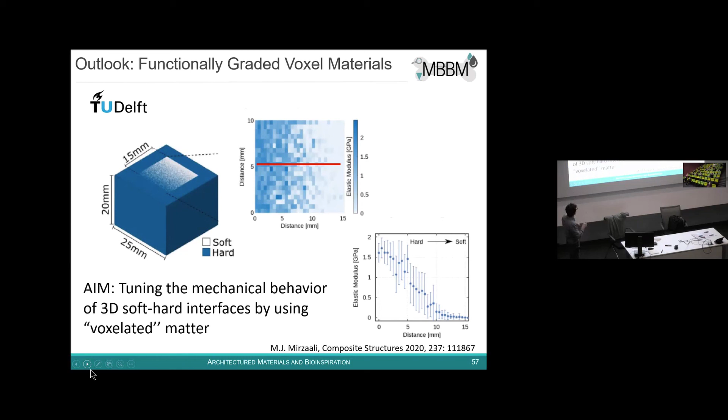Let's consider this direction, going from a very hard material to a very soft material, by depositing hard or soft voxels. By changing the spatial arrangement of those voxels, we try to understand how the elastic properties change across the interface, and how we can program different spatial configurations of soft-to-hard voxels such that the interface shows increased resistance to failure. This is something we are doing at the length scale of several millimeters.

At the smaller length scale, of tens or hundreds of micrometers, instead of a large gradient we introduce a very small perturbation—just perturbing the interface between a rigid and a soft material by changing only 4 voxels. This is what we define as minimal surface patterning or interface patterning. We introduce different designs and patterns between soft and hard voxels to see the corresponding failure behavior. These are two different things we are exploring.

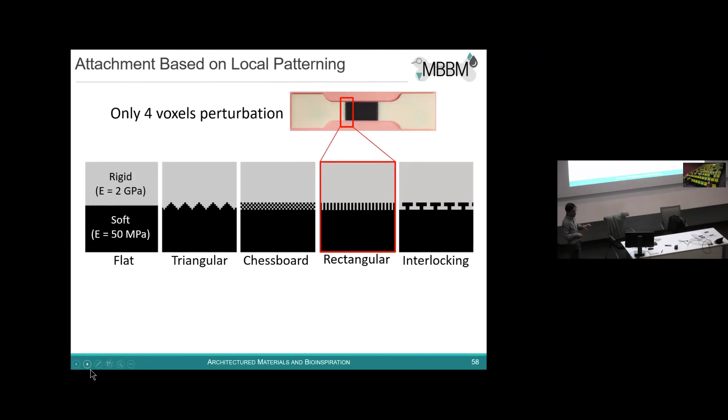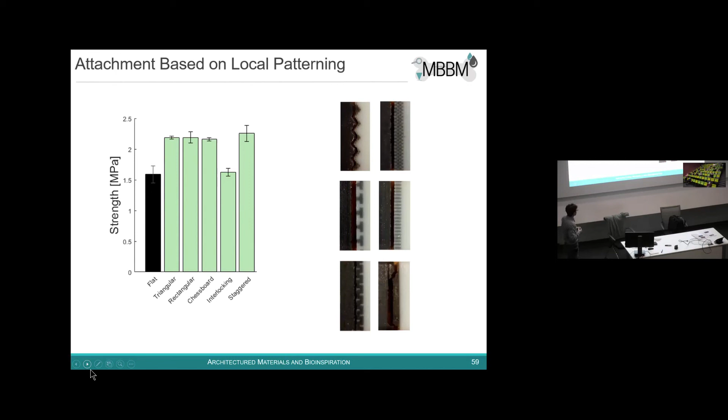We see that just by changing only 4 voxels out of a system 300 voxels in length—each voxel about 400 micrometers—compared to a flat interface, we get an increase of more than 30% in the failure strength of the system. This is something we are currently working on.